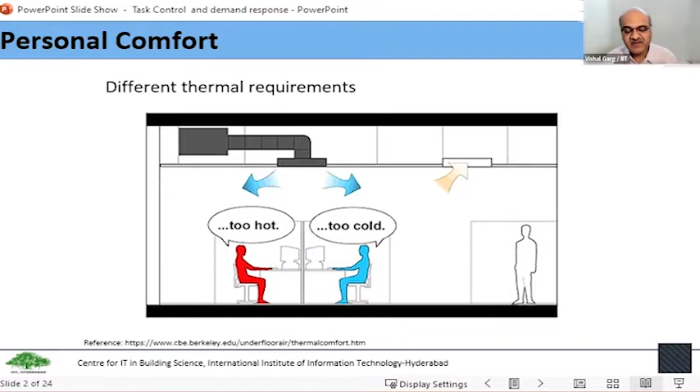It's very common to see that when multiple people are occupying any space, some people find it comfortable and some don't. Same temperature, same conditions, some people may complain that it's too hot and some may say it's too cold. Different people have different thermal requirements even when the conditions are the same, but because the requirements differ, they might perceive the space to be either too hot or too cold.

Other times, the actual conditions might be different in the building. Some part of the space is warmer because of solar radiation entering from the window, while the core part, the inside part of the space, is cooler. Therefore people sitting next to the window would complain that it is too hot, while people sitting inside the core would say it's a little too cold. So there can be a non-uniformity of temperature in the space.

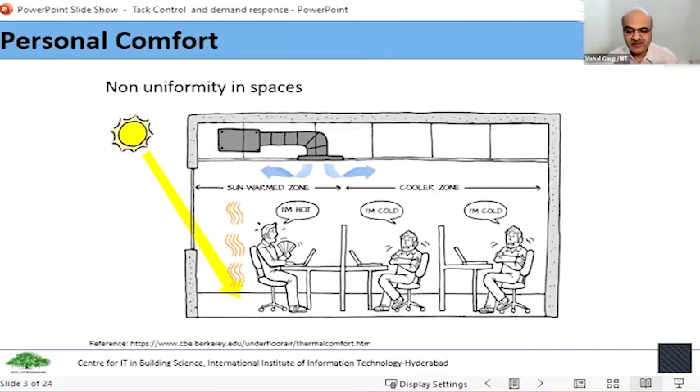So how can we deliver personalized services? It's not just air conditioning, it can be lighting also, or any other service that an occupant would like to have. The occupant would like to have personalization over his or her space and control the parameters of these services. So how can we do that?

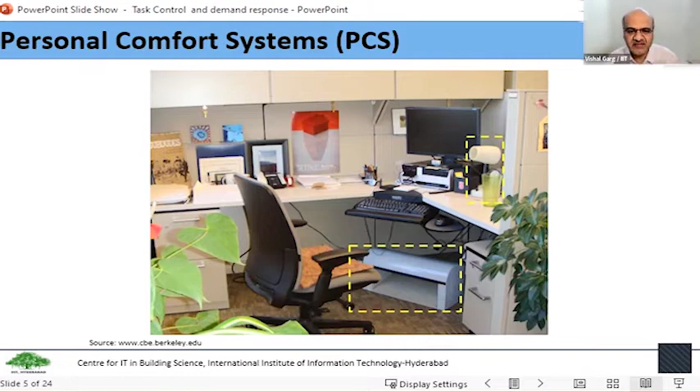There's a lot of work going on in this area, and this is called personal comfort systems. Here you can see some pictures: there is a table fan, there is a light beneath this cabinet, that's the task light, and there is a foot warmer. So different kinds of devices are being developed which can help people control the conditions in their task environment.

There are also chairs which are developed which can have their own heating element. They can have a fan also, so the chair will keep you cool or provide you warmth in winters, and it can have its own control unit so that you can control the air velocity or the temperature. Then there are floor radiant heating systems where through the floor the body can get heat convectively and radiatively. We can also provide cooling by having chilled water running into these panels to provide comfort to the user.

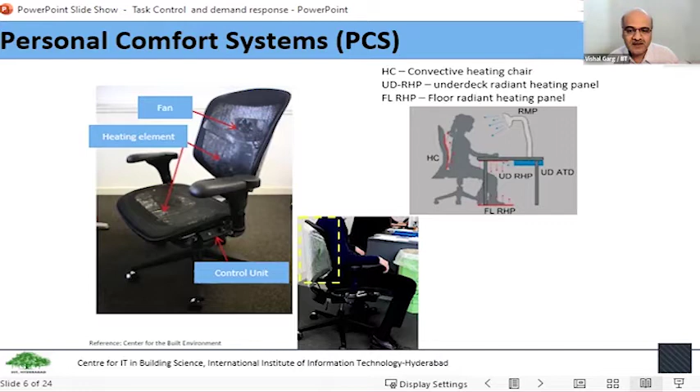So there are so many different ways people are developing personal comfort systems. A lot of cutting edge work is happening at the Center for Built Environment in Berkeley in US. The issue is that if we want to provide everybody some kind of personalization over the environment, we need to do local sensing.

We need sensors in each of these spaces to measure the temperature, humidity, whether the space is occupied or not, and whether the person is getting glare or not. We have to understand what loads are connected — suppose somebody has connected a computer, a laptop, a monitor, or a coffee maker, or any such devices. Then we have to make these talk to each other. We need a communication framework so that within the task, these elements can talk to each other, and they can also talk to the space conditioning system.

So the task light, the table lamp, is talking to the lamp on the ceiling in the space, and that is then talking to the BMS. And then the user has an interface through which they can get feedback, monitor what's happening in the space, and also control it. So there's an integration required between the task and the ambient.

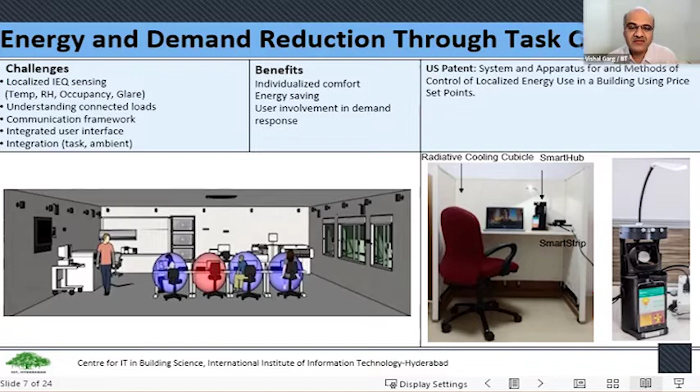So what is the benefit? We can provide individualized comfort. When people are getting individualized comfort, they are more satisfied with the environment, and their productivity is expected to be better, and it can lead to energy savings and also good demand response.

So here you can see in this picture that there are cold spots as well as hot spots. There's nobody sitting here, so this is a warm space. It's like a micro environment, a bubble, and this micro environment or bubble is controlled by the user. So we don't have to cool the whole space, we can have spot cooling and save energy.

So how are we doing this? We have a radiantly cooled desk. In this case it also has partitions, it's a cubicle. Chill water enters this cubicle, and the cubicle transfers the heat from the user through radiation. So the user can control how much the temperature of this partition should be, and control the cooling that the person is getting there.

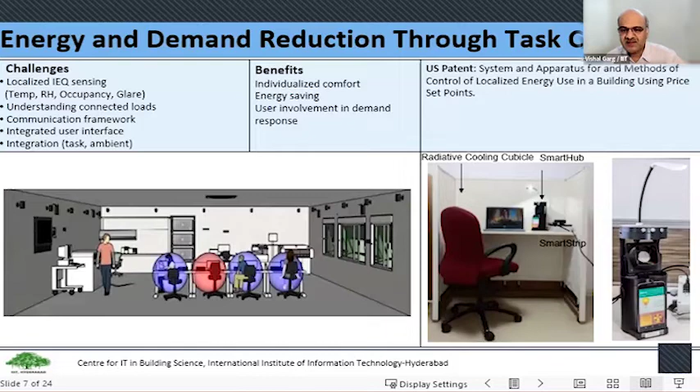Then there is a smart hub. This hub gives control over the task environment, and I'll show you how this whole thing works. The user can then decide how much heating, how much cooling, how much lighting, how much power they need. And when there is a demand response event, the user can reduce the requirement and participate in the event. We also have a US patent on this mechanism of demand response at the task level.

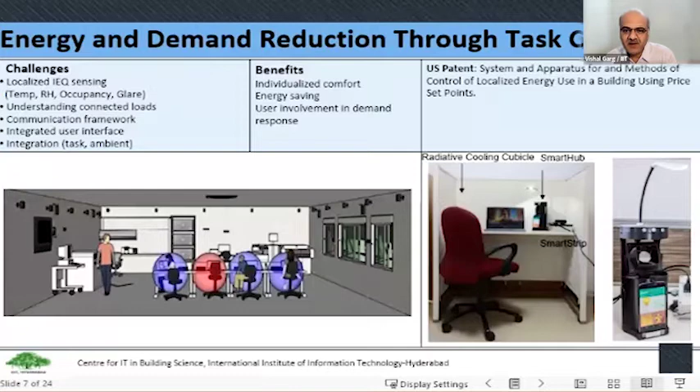So let us see what happens during the demand response event. There are two ways a demand response event can happen. One, when there is no limit to the power supply, you can get as much power as you want, but you have to pay. This is time of the day tariff or variable tariff, you pay more at certain times of the day. The other kind is where the limit is on the power, irrespective of the cost one is willing to pay. This is the load available, this is the load that can be serviced, and the cost is fixed.

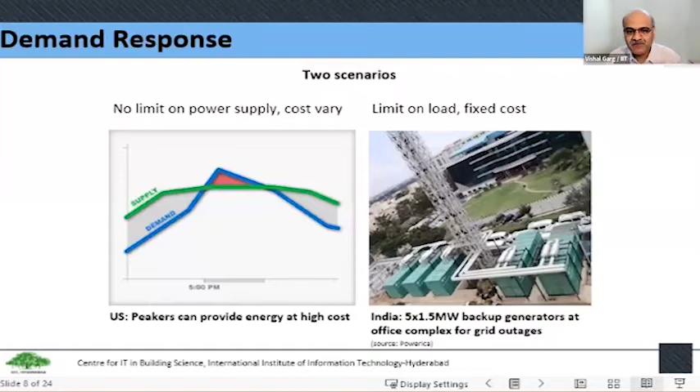So we are going to talk about the second one, where there is a limit on how much load can be put onto the system.

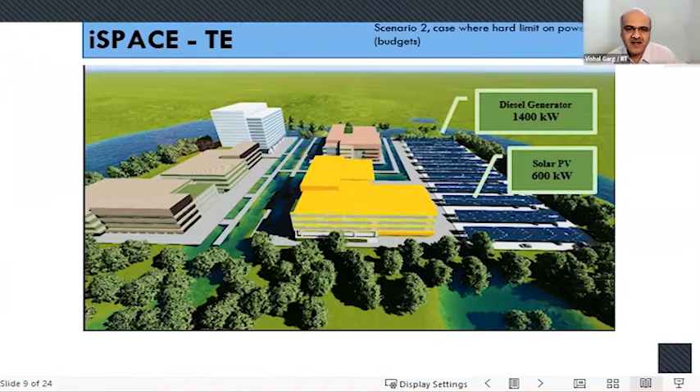So let us say there is a campus, there are a few buildings, there is a solar PV of 600 kilowatt, there is a diesel generator of 1400 kilowatt, and there are 4 buildings, and the total load of these 4 buildings is equal to the generation of 2000 kilowatts at a given time. Now this is right now grid islanded, there is no power available from the grid, and the generation is happening on site.

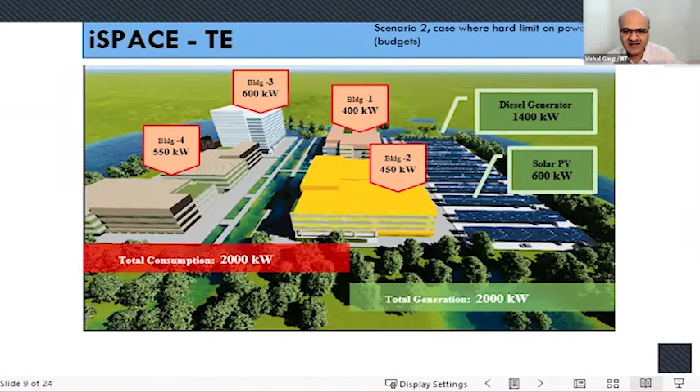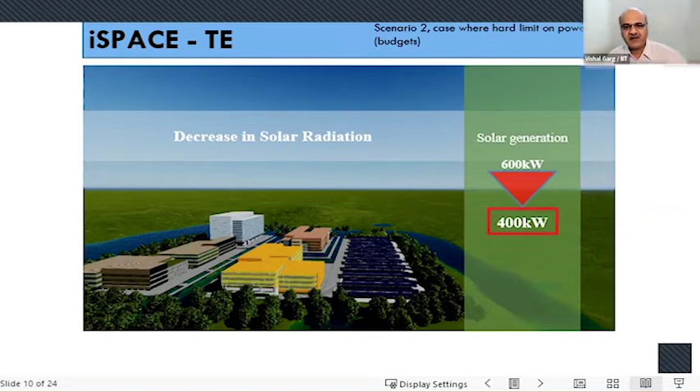Now assume that there is a decrease in the solar radiation, and therefore the generation reduces from 600 to 400 kilowatts. Then what will happen? Now every building will get a new target. So instead of 400 kilowatt, building number 1 now has to consume only 360 kilowatt.

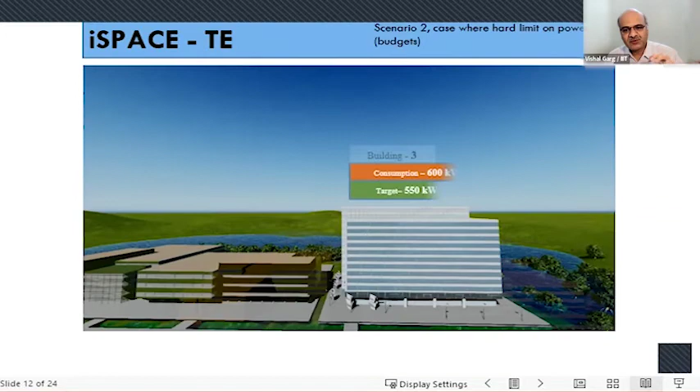The building passes this message to each floor, so each floor now gets a target. That means each floor, which is a tenant - for example another company or entity - gets their own targets. And then those targets are transferred to the individual users. So every user will now get a target to reduce energy consumption through the smart hub interface.

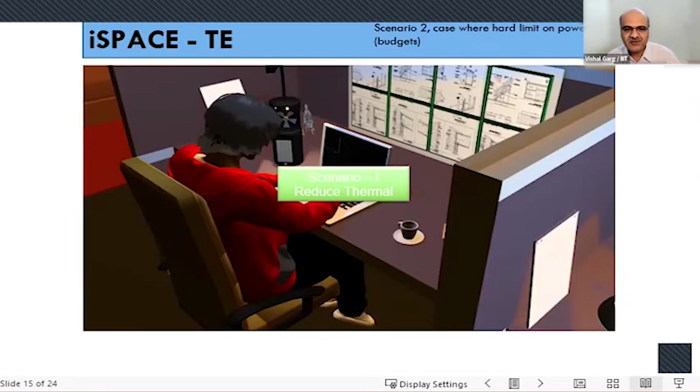Here the user gets a warning that they are consuming more, their target is 300 watts but they are consuming 400 watts. So the user selects to reduce the air conditioning. The air conditioning load is reduced, the fan speed increases to provide a little more comfort, and the consumption goes down to 300 watts.

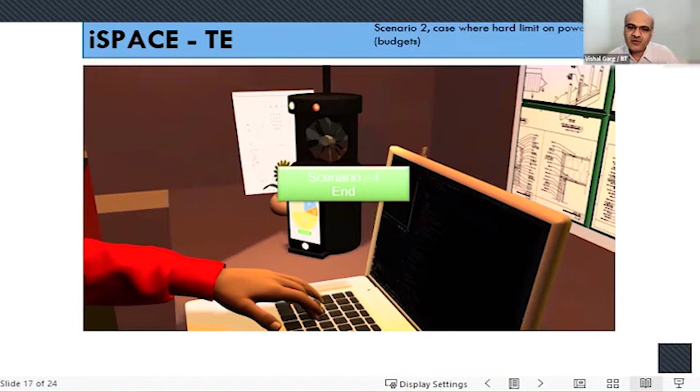In this case, the user doesn't want to compromise on thermal comfort. The user selects to reduce the plug load instead. So when the plug load is reduced, the laptop charging stops, the battery is used for doing the work, and the user is able to bring down the load.

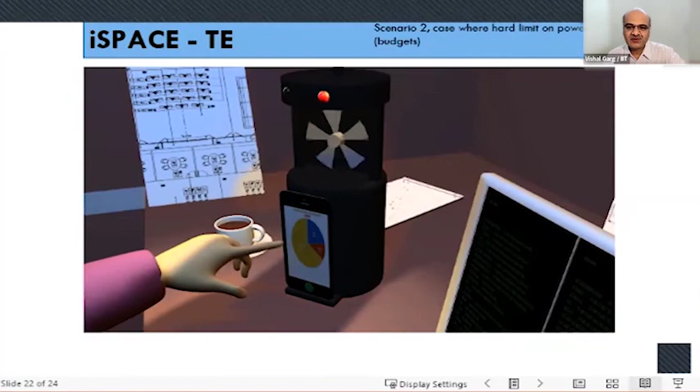Now let us see the second scenario. In this case there is a power user who doesn't want to reduce anything - doesn't want to compromise on lighting, doesn't want to compromise on air conditioning - and is willing to pay for some more. And then there is this other person who is willing to share her load. So this person, instead of 300, now gets a lump of 600, and the other person takes a break and can go for a coffee or something.

And the idea is that in a small time frame of 5 minutes, can we reduce the demand by 50% with everybody's participation and everybody deciding what preference they want for their comfort.